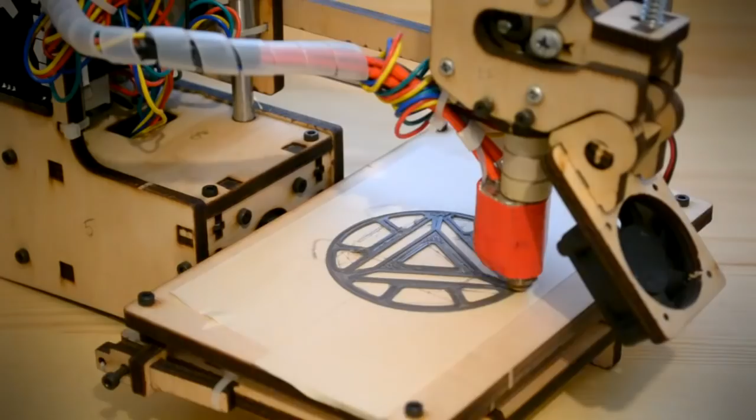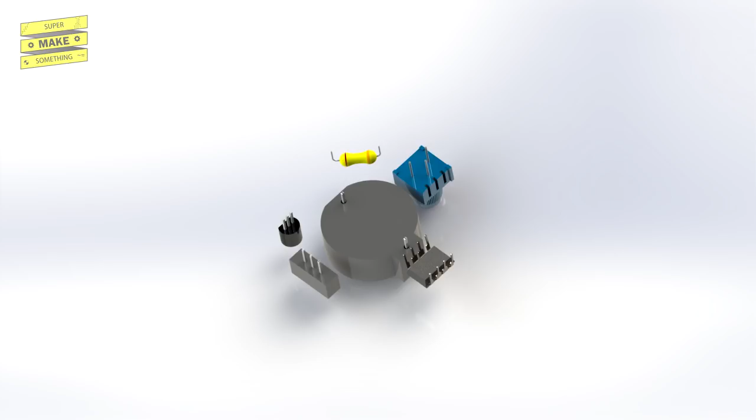The arc reactor is made out of the following components: one ATtiny85 microcontroller, one coin cell battery holder, one single pole double throw mini power switch, one 10 kiloohm potentiometer, one NPN transistor, one 10 kiloohm resistor, one custom interface PCB, 11 royal blue Adafruit sequin LEDs, one 3D printed diffusion ring printed out of clear PLA,

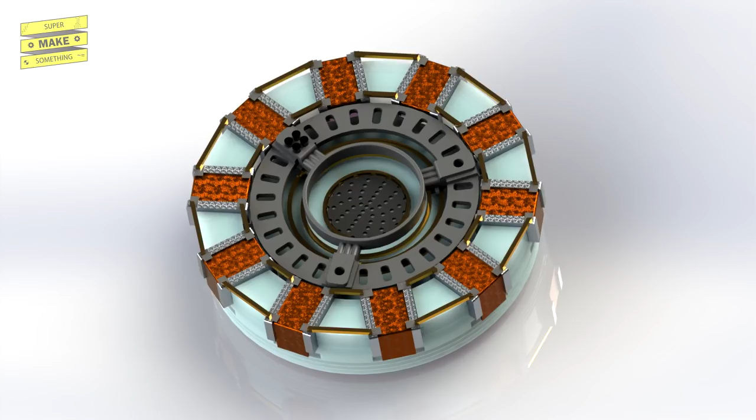one circular piece of wire mesh, 4 3D printed concentric rings, one 3D printed center ring assembly, 10 3D printed coil spacers, 30 gauge copper magnet wire, 40 silver solder pads cut out of cardstock, jumper wires to bridge the coil spacers, one 3D printed base plate, and 5 M2 screws to hold the circuit board and center ring assembly in place.

I began this build by searching for the arc reactor's dimensions online. The general consensus on the replica prop forum was that the outer diameter of the diffusion ring was 3 inches. Based on this, I next headed to Google Images, where I found a front view image of the officially licensed Iron Man movie arc reactor prop replica. I saved this image, opened it up in Inkscape, and then scaled it so that the outer diameter of the diffusion ring matched the diameter that I found online.

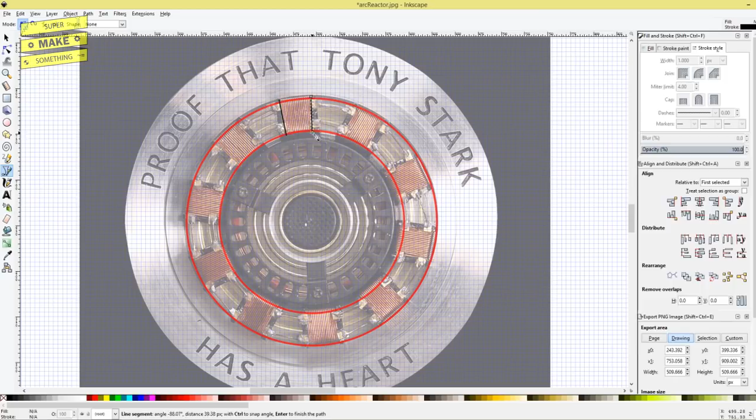This allowed me to extract the rest of the dimensions for all other features on the arc reactor by tracing lines on the photo and writing down their lengths. This process took a while. To give back to the online prop making community, I decided to make a dimension drawing from these measurements, which will hopefully save someone some time should they decide that they want to make this arc reactor using a different method than 3D printing in the future.

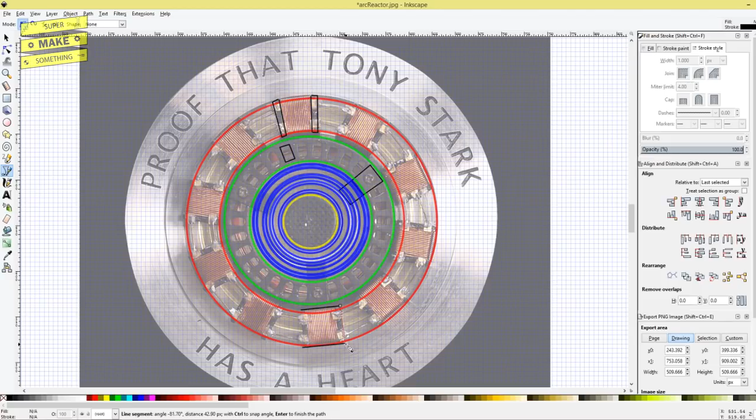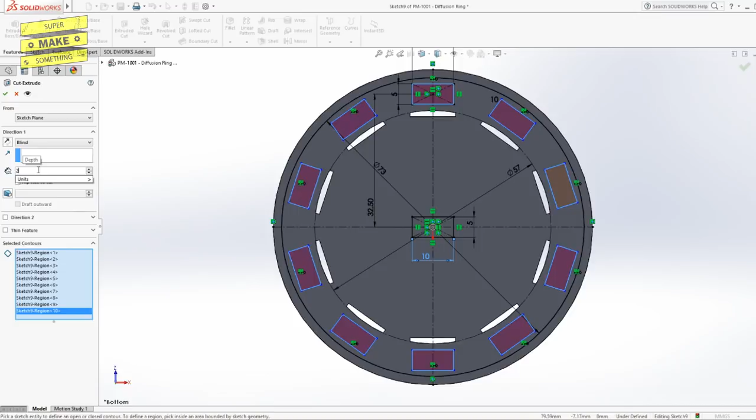Once I had extracted all of the dimensions from the arc reactor photo, I opened up SolidWorks, a computer-aided design or CAD software package. Here, I created 3D models of each of the arc reactor pieces in the photo using the line lengths I had measured in the previous step. While the photo allowed me to get the length and width of each component, it did not provide any depth information. This gave me some freedom to model these dimensions to best fit my design idea.

Specifically, I decided to emphasize wearability. I wanted to make sure that the height of each piece was as short as possible in order to make the arc reactor as thin as possible. My thinking here was that this would make it easier to wear this prop for an extended period of time and minimize the risk of accidentally bumping it into things and breaking off components.

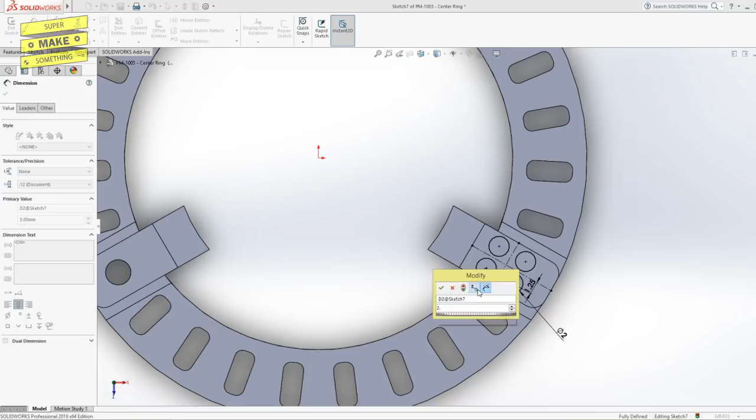During this process, I simultaneously created a virtual assembly of the arc reactor, which allowed me to make sure that all of the pieces would fit together, as well as add features and modify dimensions on the fly. Once I was satisfied with the overall look, I saved each component as an STL or stereolithography file, which generates a mesh of each piece that can then be 3D printed.

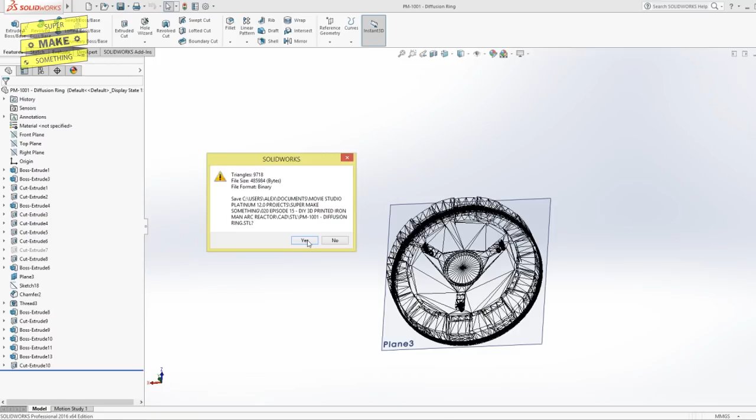Next, I opened up Cura, a free 3D printing slicing application in order to generate G-code to tell my printer how to make each object one layer at a time. Because this arc reactor has a lot of fine details, I printed each piece at 0.1mm layer height. I also decided to print the diffusion ring with 100% infill to avoid having a grid pattern shine through the translucent plastic when it is lit by the LEDs.

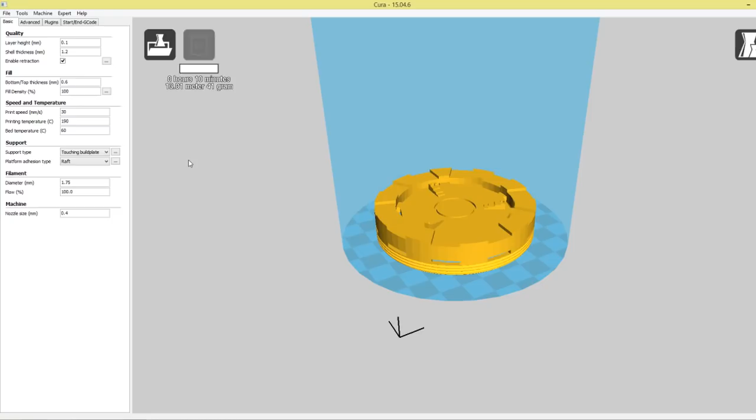Finally, I also enabled supports for each piece, since the arc reactor has many components with overhang features which allow the pieces to nest together vertically. Once everything was set, I exported the G-code to an SD card and plugged it into my 3D printer.

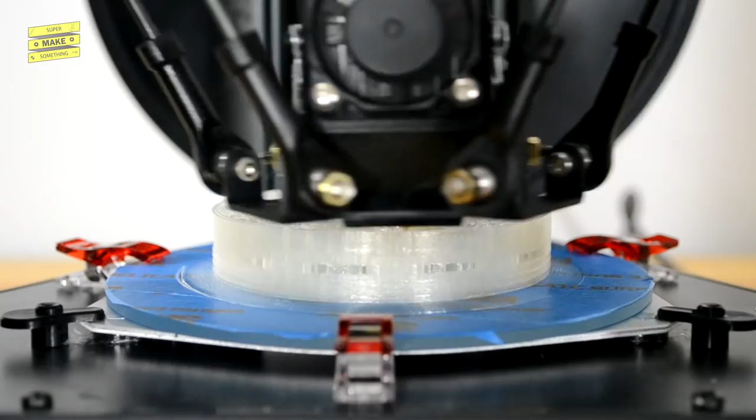Overall, the arc reactor is surprisingly small, with the biggest piece being the chest harness that all of the other components mount to. Because of this, all of the pieces should be able to be printed without splitting them up any further on most hobby printers. I'm printing my pieces on the Monoprice Mini Delta, which has a circular build area with a diameter of 110mm or roughly 4 1/3 inches. While this is small compared to some other printers available today, it was more than enough space for each of the arc reactor components.

Delta printers have the advantage of being able to print slightly faster than printers that use an XY carriage, however these shots are time lapses, not real time. The total print time for all components was approximately 10 hours. While the components printed, I headed back to my computer to start on the project's electronics.

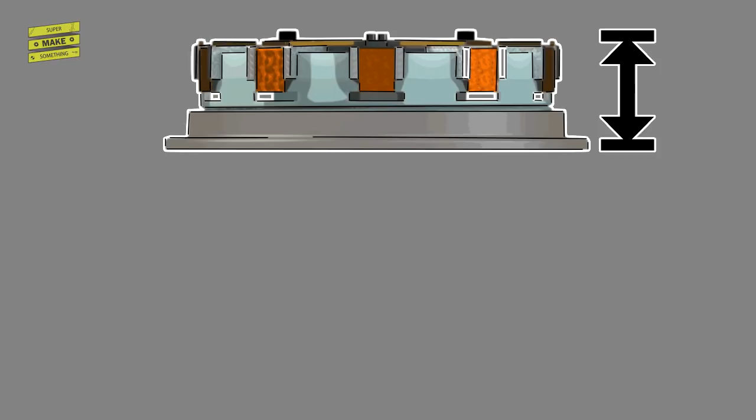Since one of my design goals was to make the arc reactor as short and self-contained as possible, I decided to create a custom circuit board to light and power the device. I first headed back to SolidWorks and opened up a CAD model of the PCB or printed circuit board that I modeled in the previous step.

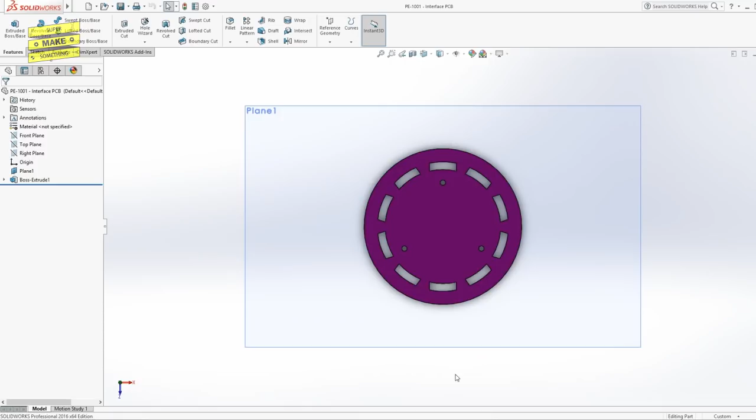Because the electronics need to stack behind the 3D printed components of the arc reactor, the circuit board needs to have a custom circular shape that needs to be specified during the PCB design process. To do this, I saved the circuit board outline as a DXF or drawing exchange format file, which I could import into my PCB software when laying out the board in the next step.

The circuit board was designed in Eagle, a schematic and PCB layout program available from Autodesk. Once the program loaded, I started a new project and then created a new board. I next imported the DXF file from the previous step using Eagle's DXF import function found under File, Import, DXF. After locating my file using the Browse option and making sure that the Target Layer dropdown option was set to 20 dimension, I clicked OK and then clicked the Run button in the following window.

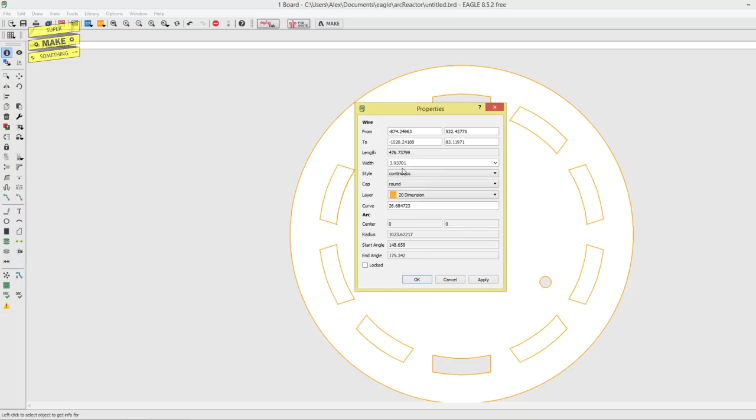This imported my board outline into Eagle, though not all of the pockets in the drawing were recognized as closed contours. To fix this, I found the open line in each of the pockets and set their X and Y locations to be coincident, which changed the pocket color to gray, indicating that it will be milled out during the PCB fabrication process. I next clicked on the Switch to Schematic button located in the Eagle taskbar, which took me to a new screen that would allow me to wire up the arc reactor circuit.

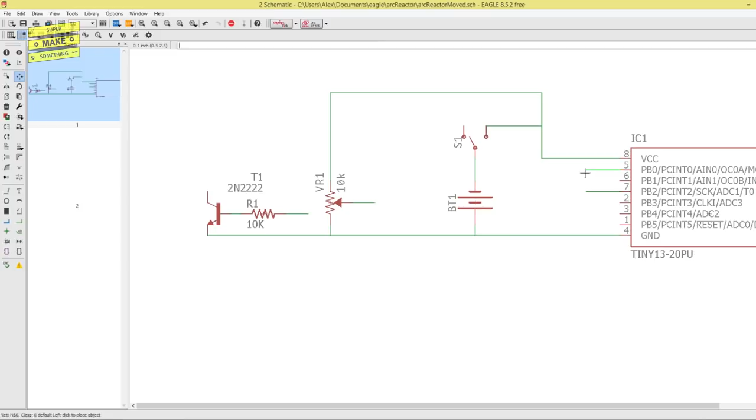While the details of using Eagle are outside of the scope of this video, the PCB design process essentially boils down to placing the components you would like to use into a schematic and connecting them together appropriately using virtual wires. Once the components were wired up in the schematic, it was time to arrange the arc reactor's electronic components on the circuit board. Clicking the Generate/Switch to Board button at the top of the Eagle taskbar switched back to the board layout graphical user interface, where components from the schematic could be moved around to fit onto the PCB.

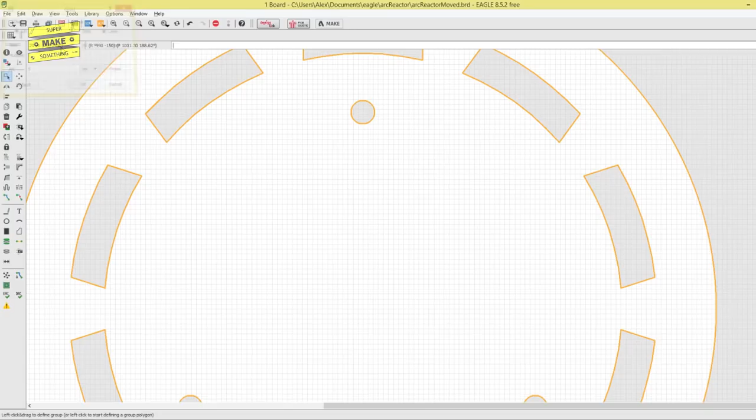Here, I first drew polygons that matched the size of the sequin LEDs that I would be using to light the arc reactor onto the circuit board for reference. This would help me place the SMD parts in the correct locations of the board so that I could solder them onto the PCB. I next began to populate my board, placing all of the SMD components on one side of the circuit board and all of the other components on the opposite side.

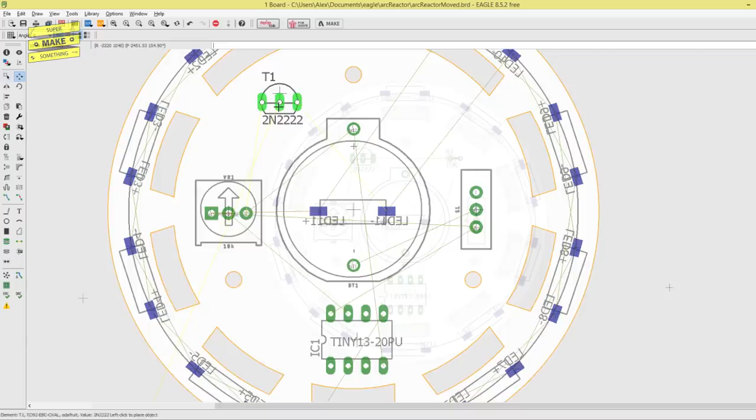Once the components were arranged to my liking, I used the Auto Route button to generate the PCB traces that connect everything together. Because you should never blindly trust the auto router, I next used the Show tool to inspect that everything was connected the way I thought it should be.

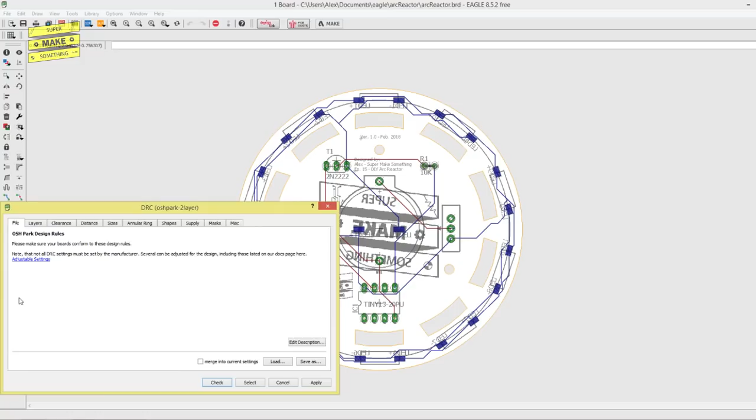I next added text and logos that will be printed on the circuit board's silkscreen layer to be able to identify the PCB. The final step was to make sure that the PCB followed the design rules of the fabrication house that I would use to manufacture the boards, which was done by clicking on the Check DRC button. After verifying that everything was good, I saved the board and closed Eagle.

I manufactured the boards using OSH Park, a PCB manufacturer located in Lake Oswego, Oregon. On the OSH Park homepage, I simply uploaded the board file, waited for the board to finish processing, entered some information about the PCB on the following page, verified that everything looked okay one final time on the confirmation page, and then clicked the purchase button. 3 weeks later, I received 3 copies of my board in the mail in an awesome purple color.

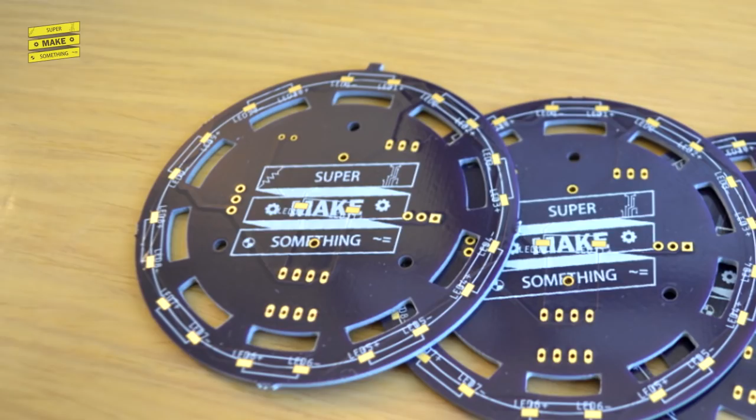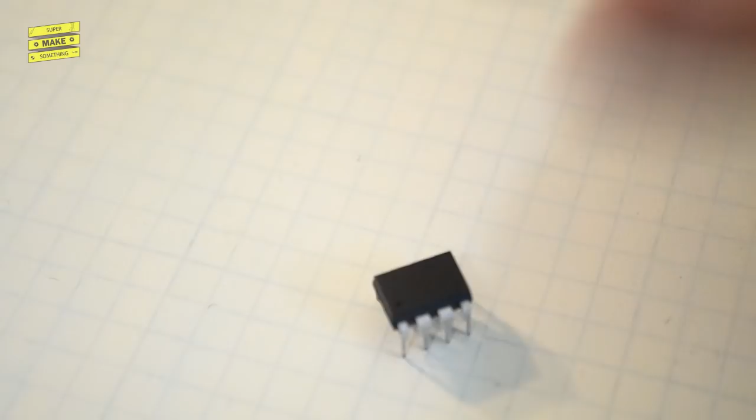With the PCB in hand, it was time to program and assemble the arc reactor's electronics. The core electrical components of this project are an ATtiny85 microcontroller and 11 royal blue sequin LEDs from Adafruit.

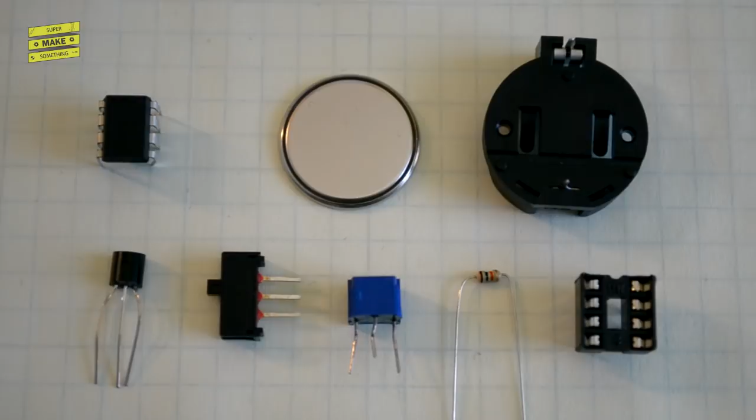In addition to these components, this project also uses one coin cell battery, one coin cell battery holder, one 2N2222 NPN transistor, one single pole dual throw on-off switch, one 10 kiloohm potentiometer, one 10 kiloohm resistor, and one 8-pin DIP IC socket adapter. This last component is completely optional, but will allow me to remove the ATtiny from the circuit board once everything is assembled in order to program new light patterns without desoldering the chip.

Before continuing, let's take a look at the circuit behind the arc reactor. The ATtiny85 microcontroller essentially acts as a bare-bones Arduino, without any supporting hardware like USB ports, voltage regulators, and other components found on bigger, commercial versions of these boards. Power is supplied to the ATtiny using a 3-volt coin cell watch battery, which also powers the rest of the electronic components in the circuit.

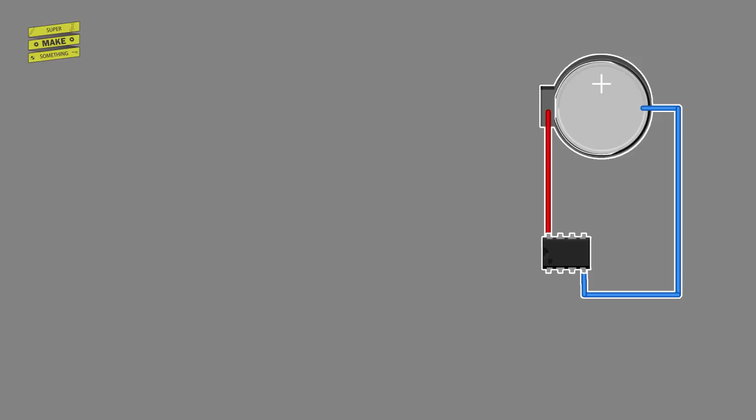A potentiometer is connected to one of the microcontroller's analog read pins, whose resistance can be adjusted to change the voltage across the microcontroller's sensing pin. This voltage is then read by the ATtiny, which uses this value to generate a PWM command that changes the brightness of 11 parallel surface mount LEDs, each of which has a corresponding in-series resistor.

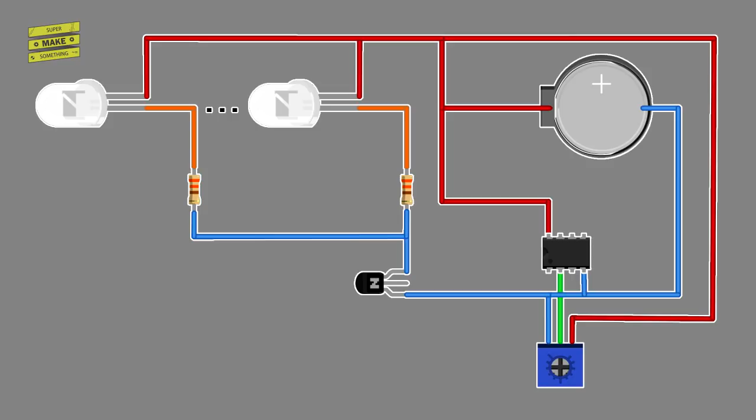Unfortunately, the LEDs cannot be powered from the ATtiny's PWM pin directly because they would draw more current than the pin can supply. Therefore, the positive terminals or anodes of the LEDs are directly connected to the 3-volt line of the battery, and an NPN transistor is located between the LED resistor pair's negative terminal and the rest of the circuit's ground line. Unlike the Arduino pin, transistors can handle large currents across their emitter and collector pins, opening and closing the circuit based on relatively low input current at their base pin. This essentially makes transistors a type of electronic switch.

The transistor's base pin is connected to the ATtiny's PWM pin through an in-series 10 kiloohm current limiting resistor, and opens and closes the connection between the LEDs and ground depending on whether the value of the PWM signal generated by the ATtiny is low or high. By quickly flashing the LEDs on and off using this PWM signal, the LEDs appear to be lit at different brightnesses depending on the length of time the PWM signal is high versus the length of time the PWM signal is low. This is also known as the PWM duty cycle.

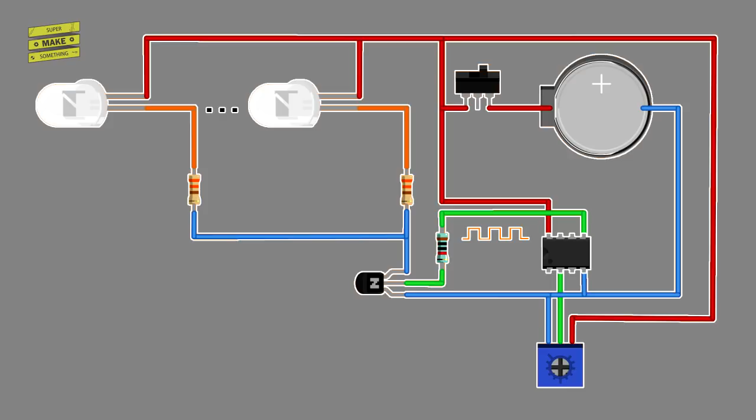Finally, a power switch is located between the battery's positive voltage terminal and the rest of the circuit, which can be used to turn everything on and off. The ATtiny85 is programmed using the Tiny AVR programmer from SparkFun. While it is necessary to install a driver and board definitions to use these components with the Arduino IDE, the installation process is incredibly straightforward.

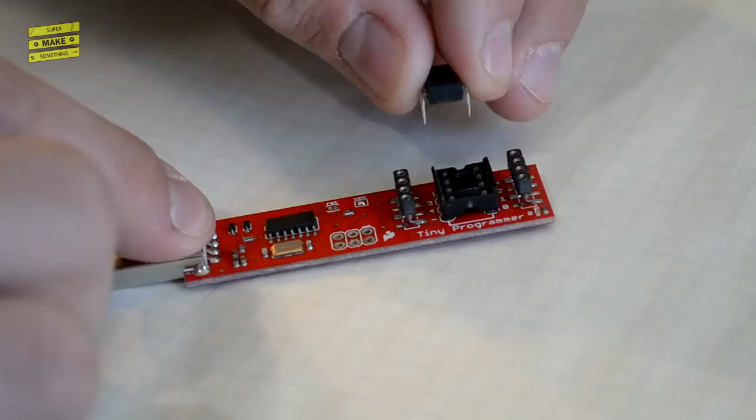Once everything was set up, I plugged the Tiny AVR programmer into my USB port and started the Arduino IDE. The code for this project is also very straightforward and does the following. The code first declares variables that define the pins that will be used to output PWM signals and read the potentiometer, as well as a variable for the PWM value. It next sets the PWM pin as an output pin in the setup method.

In the main method, the program first performs an analog read of the potentiometer value. It next maps this value between the range of 0 to 255, which, for the Arduino, correspond to a signal that is either entirely off or entirely on. Finally, it outputs this value on the PWM pin, pauses for 100 milliseconds, and then loops again.

Once I was happy with the code, I ensured that the following options were selected in the Tools menu: board option ATtiny 25/45/85, processor ATtiny85, and clock internal 1 MHz. I then clicked the Upload button, which compiled the code and uploaded it to the microcontroller. Once the LEDs on the Tiny AVR programmer stopped blinking, I unplugged it from the USB port and could begin to solder all of the components to the PCB.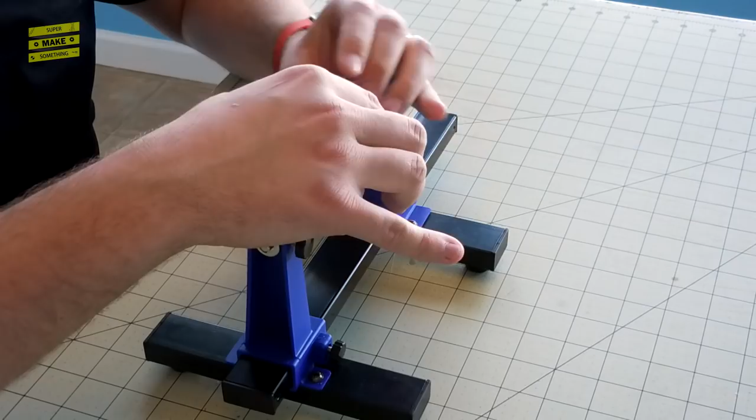I began by mounting my circuit board into my PCB holder. I next soldered all through-hole components, beginning with the potentiometer, followed by the 8-pin socket adapter, 10 kiloohm resistor, on-off switch, transistor, and battery holder to the circuit board.

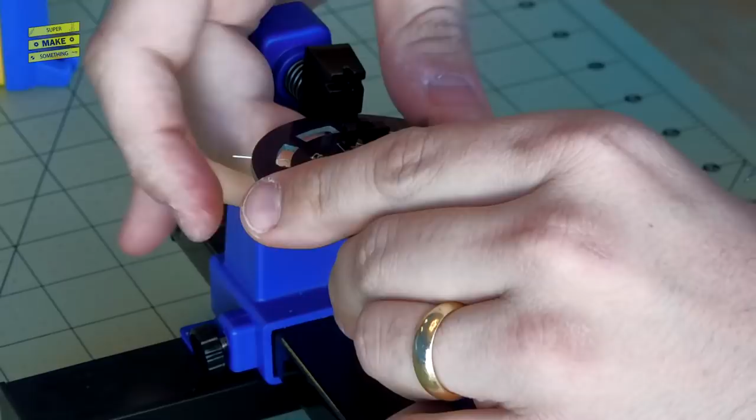After inserting the watch battery and turning on the power, I flipped the PCB over and applied a drop of solder to matching solder pads. I then held the LEDs in place and remelted the solder on the pads, which electrically connected the LEDs to the rest of the board.

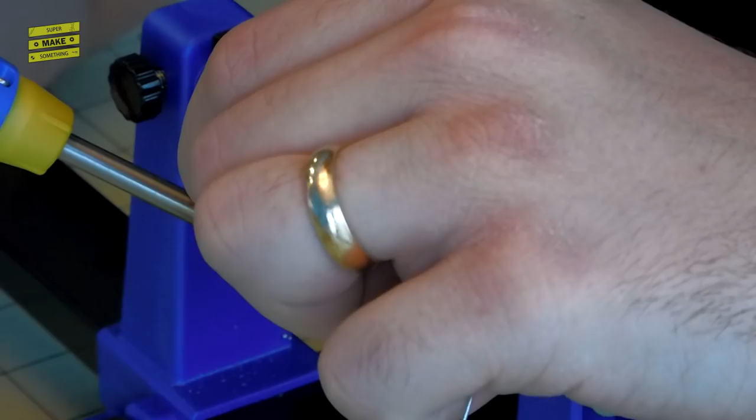Since the power was on during soldering, the LEDs lit up to indicate that the electrical connection was good and that everything was soldered correctly. I then repeated this for the remaining 9 LEDs.

Once the electronics were done, it was time to paint the arc reactor. The 3D printer made the following components: 1 base plate, 1 diffusion ring printed out of clear PLA, 10 coil spacers, 1 3D printed center ring assembly, and 4 concentric rings.

The arc reactor components were painted using black, gunmetal, silver, and gold acrylic paints that I bought from my local craft store. I first added drops of each of these colors into a 6-well plastic palette, which would allow me to mix the paints together without making a mess on my cutting mat.

Because some of the components were also very small, but needed to be painted evenly from every side, I used a sheet of paper as a backdrop and applied pieces of double-sided tape to its middle. This allowed me to tape my pieces to the paper and keep them from moving around while painting.

I began by painting the 4 concentric rings using gold paint. I wanted to go for a worn look, so I did not worry too much about painting all of the pieces evenly. Instead, my strategy was first to paint everything using a bit too much paint, dry off the paintbrush, and then go back and spread the paint to make sure that everything was covered.

The center ring assembly was painted with a mix of black and gunmetal paint, with a final dry brush layer of black paint to enhance some of the piece's details. The coil spacers were painted with silver paint, which I left attached to the 3D printed support material to keep everything upright and make painting easier.

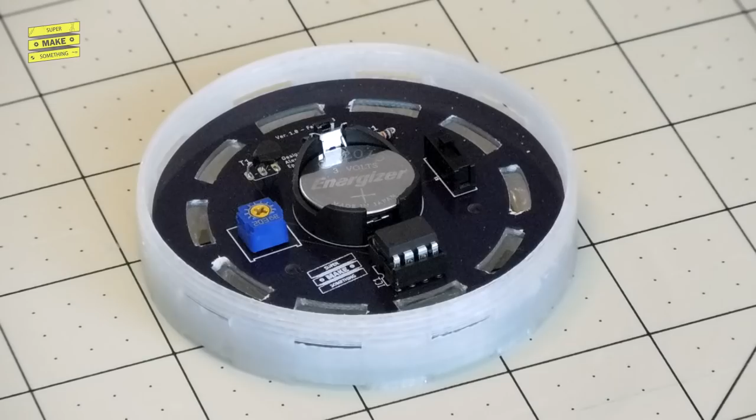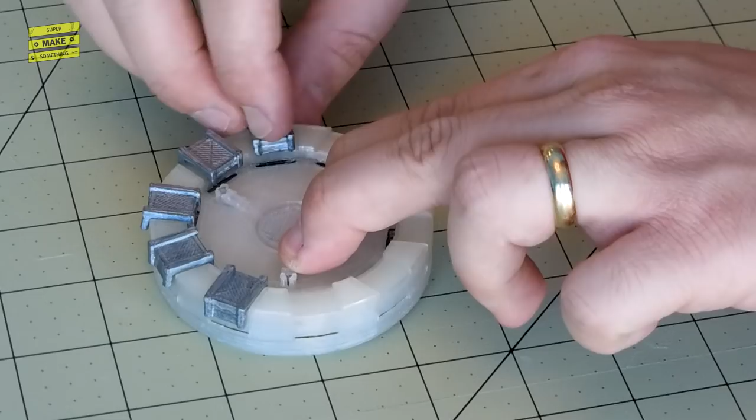While the painted pieces dried, I began to assemble the arc reactor. I first inserted the PCB into the diffusion ring. I then attached these components to each other using 3 5mm long M2 screws, making sure that the circuit board was oriented so that each of the LEDs were located underneath the diffusion ring's indentations. I next inserted the 10 coil spacers into the indentations, gluing everything together with a dab of superglue.

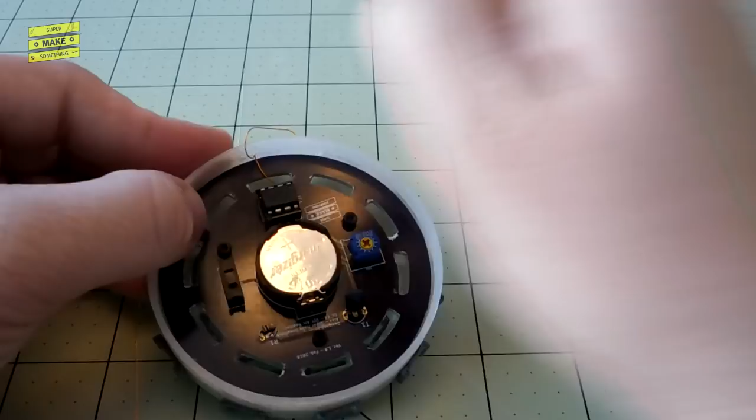Once this was complete, it was time to wrap the coils using 30 AWG enamel-coated magnet wire. I first cut an arm's length of magnet wire from the spool. I then inserted one end of the wire into a slot in the diffusion ring, wrapped a piece around the neighboring slot to keep everything taut, and then wound the wire over the coils, through the slots of the diffusion ring and PCB, until the entire width of the coil was covered in a layer of wire.

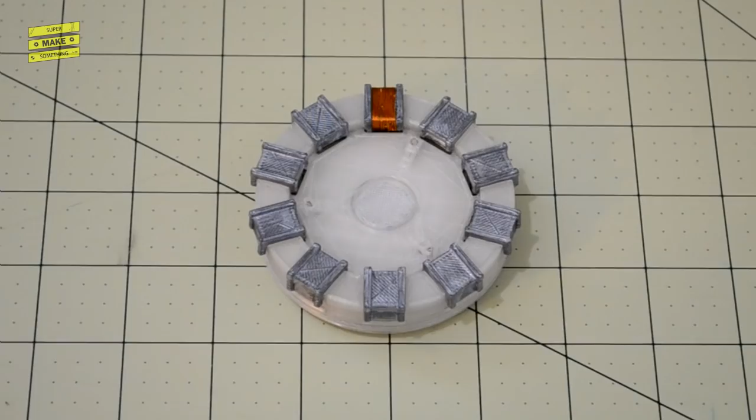Once complete, I wound the start of the coil to the end of the coil to hold everything in place, finally cutting off any remaining wire using a pair of snips. I repeated this process 10 times, once for each coil spacer, which took a total of about 4 hours.

The mesh portion in the arc reactor center is made out of an adhesive-backed screen door repair sheet that I picked up from my local hardware store. I first cut a 2x2 inch piece from the sheet using a ruler and X-Acto knife. I next traced the outline of the middle concentric ring onto the screen's backing sheet using a pencil, and cut out the resulting circle using a pair of scissors.

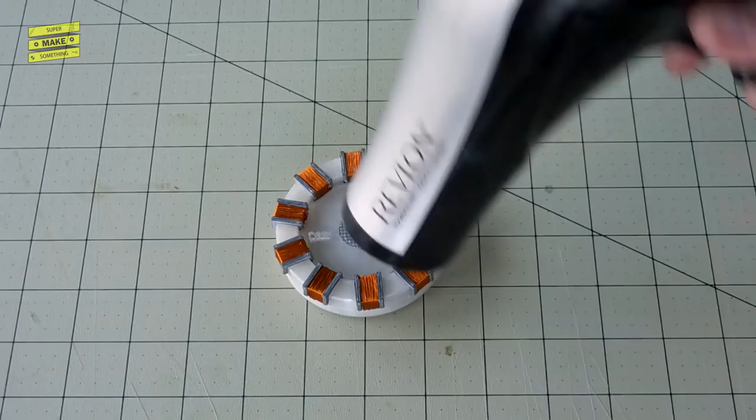I then peeled the screen off of the backing sheet, stuck it to the middle of the arc reactor, and used a hairdryer to melt the screen's adhesive to the diffusion ring. Once the screen was attached to the diffusion ring, I trimmed any excess with an X-Acto knife.

I next pressed the smallest concentric ring into the channel in the diffusion ring. I then attached the other concentric rings to the 3D printed steps of the diffusion ring using dabs of superglue, positioning everything with a pair of tweezers. Once all the rings were glued, I placed the center ring assembly onto the top step and screwed it to the diffusion ring using two 10mm long M2 screws.

The next step was to cut 40 3x2mm solder pads out of silver cardstock that I had bought from my local craft store. For this, I used my craft cutter, though this could also be done by very carefully cutting the cardstock using an X-Acto knife.

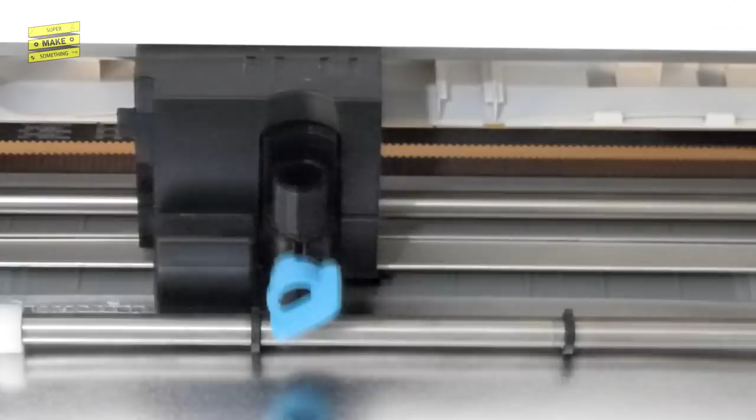After loading the cardstock into the cutter, the machine's knife moved through the paper cutting tiny silver rectangles. Because of the tiny squares and cut settings, I knew that some of the rectangles would slip off of the adhesive-backed cutting mat during the cutting process, potentially becoming unusable. To solve this, I simply cut more squares than I needed to, banking on the fact that I would get at least 40 good cardstock solder pads after the machine was done.

Once it finished cutting, I ejected the mat and cardstock from the craft cutter, and then carefully picked off individual squares with my tweezers, putting them into a small bowl for safekeeping. The pads were glued onto the top and bottom front face edges of the coil spacers, again using superglue and tweezers. This step is entirely cosmetic, but really helps to enhance the arc reactor's likeness to the one worn by Tony Stark in the movie.

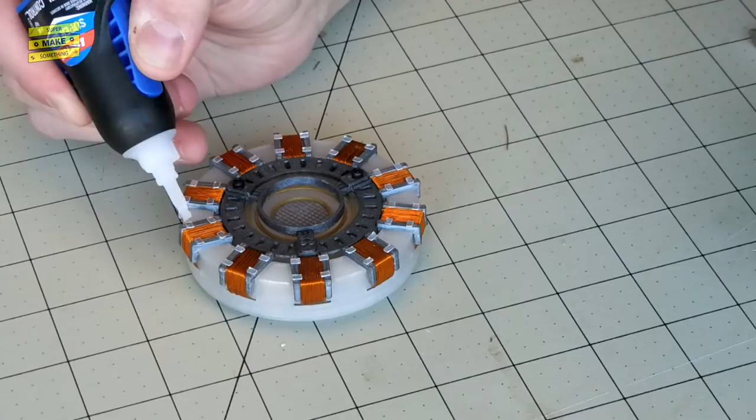The final step was to cut jumpers to bridge each of the solder pads out of gold craft wire. Instead of individually measuring each piece, I found it easiest to cut a small length of wire and then trim it to length to fit appropriately. The jumpers were again positioned using tweezers and attached to the pads using superglue.

At this point, the prop portion of the arc reactor was done, so it was now time to make a harness using the 3D printed base, 1-inch wide nylon strapping, and 2 sets of parachute buckles. I first cut 2 nylon straps so that their combined lengths could wrap across my chest diagonally. I then melted the cut ends of the straps with a lighter to make sure that they would not fray. Next, I looped one end of the strap through the parachute buckle's male end so that I could tighten the strap by pulling on it.

After this, I folded the end of the strap over to create a tab and then sewed it to itself. I then looped an end of the other strap through the buckle's female end and sewed it to itself into a loop. After this, I inserted a free end of one of the straps into one of the slots of the chest harness, doubled it over, and sewed it into a loop. I then inserted the remaining strap's free end into the slot diagonally across from the first slot and repeated the process. I then did all of these steps again for the second set of parachute buckles.

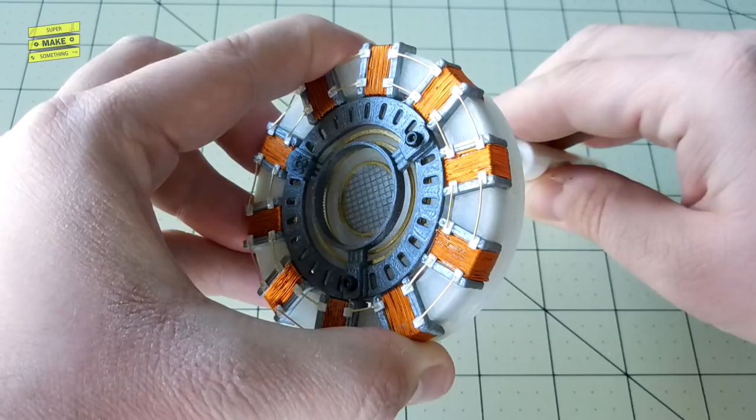I next adjusted the brightness of the LEDs using the potentiometer, screwed the prop portion of the arc reactor into the base plate, and the arc reactor was done. The final step was to strap the arc reactor to myself across my chest, put on a black t-shirt with a hole cut into it, and put on an Iron Man themed hoodie to complete the look.

I now had a 3D printed, dimmable, and completely self-contained arc reactor that I could wear to midnight premieres of Marvel movies, use as a quick Halloween costume, or to simply have an interesting movie prop that I could display on my desk. The arc reactor is a fun weekend project for anyone looking to have their own Iron Man movie prop.